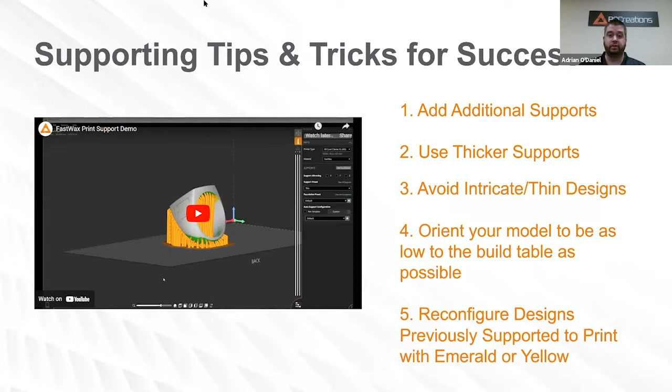So I'm going to start off with our first video, which is talking about supporting a part within the B9Create 2.0 software. Before I start, I'm just letting you know this support scheme does work for both 1.0 and 2.0 users. I'm just demonstrating 2.0 today. So I'm going to go ahead and start sharing this video.

Hello, today I am going to show you how to get a ring prepared within the B9Create 2.0 software to print using our FastWax resin. The reason why we are making this video is because to print properly within FastWax, you have to change how you support the ring. You can't use how you used to support a ring within Emerald or Yellow because FastWax is a different formulation of resin, so it requires a slightly different approach in order to get successful prints.

The ring that I'm going to show how to support today is our Matrix Signet ring, which is like a class ring type style ring. I'm going to go ahead and open that onto my build table here. That part is just the same as any other ring or any other print. So once I have the ring on my build table, I'm going to go ahead and center it and zoom in a little bit.

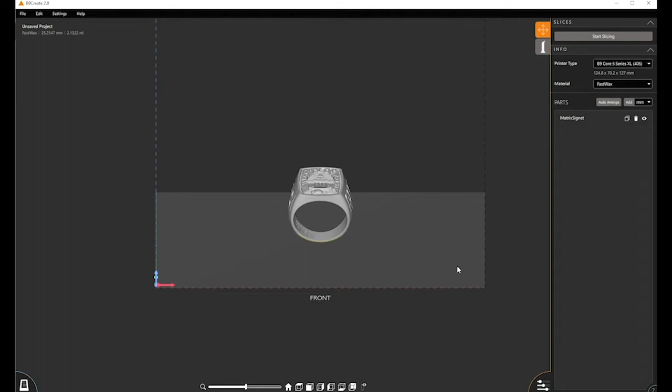First thing I'm going to do is turn the model to the side and click on it. And I know for this ring, I need to tip it forward like so in order for it to print properly. So once I've done that, I'm going to turn the ring back to the front. And then I'm going to make sure that it is just slightly above the build table. So my goal is to get the part as close to the build table as possible and then just raise it up just a little bit.

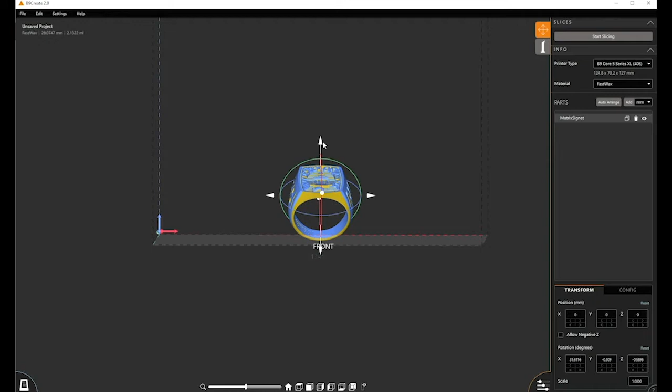That's because those first few layers on our printer come out at a different dimension because they cure longer. So you don't want the bottom part of your ring to be a different size. So then once I have the ring ready to support, I am going to come over here and click supports. And then my ring is ready to start adding supports.

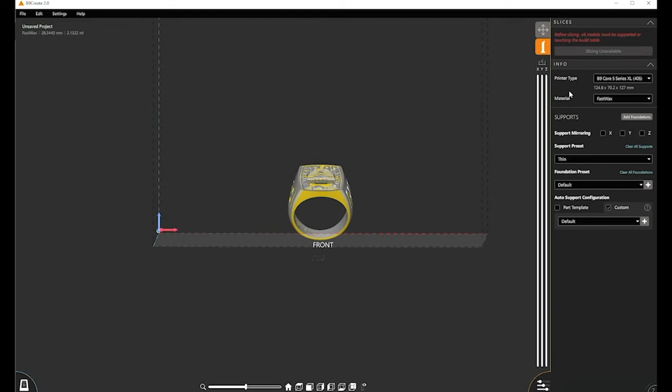So the first thing I'm going to do is add support mirroring at the Y axis. This is going to enable me to add supports to both sides of the ring, but only need to click on one side. The next step before I start adding supports is under support preset. I'm going to change this drop down and make sure that it is set to thin.

If you're using tiny, you are going to have prints fail to come out either the right shape or they're just going to fail completely because the support doesn't work. So FastWax is very soft while it prints. And if the support is too skinny, it is going to wiggle while it prints, and it's not going to stay connected to the model or to itself during the print process. And then you're going to end up with the support not doing its job by the time it gets to the ring.

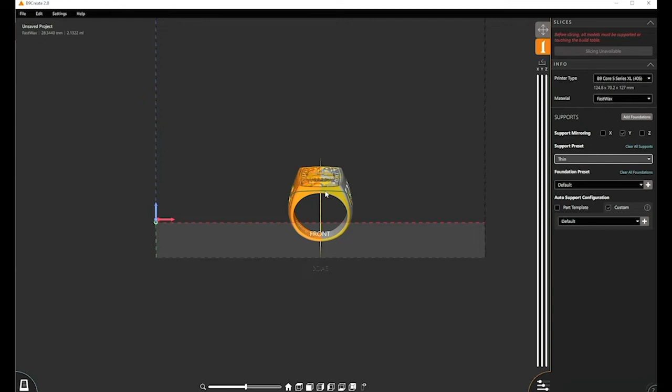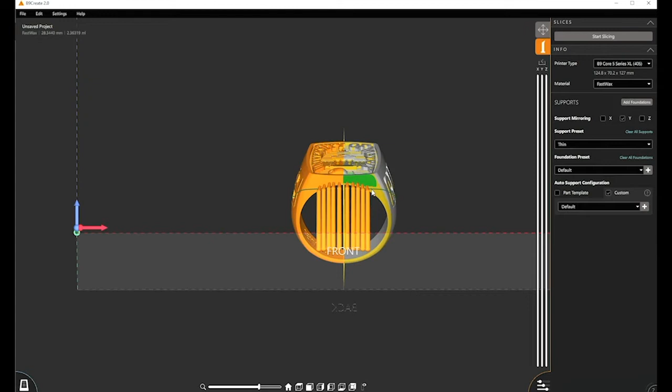So now I'm going to zoom in a little bit, and my goal is going to be to start adding supports simply by pointing and clicking. I'm going to start around the bottom edge of the ring, and as you can see, I'm adding quite a few supports here. So as I'm going around, we are just supporting this, and you are adding way more supports than you would with a different type of resin.

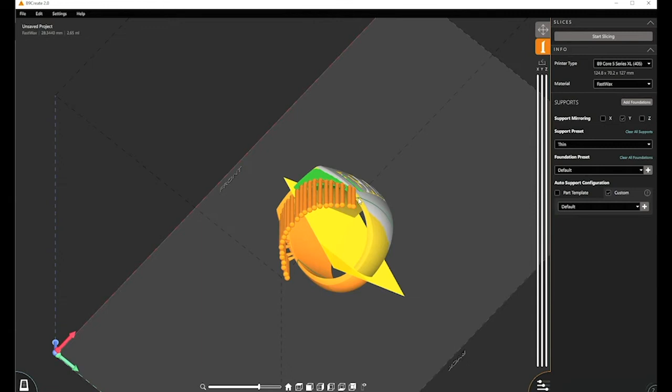And that is because, again, the resin is soft, so you have to do it this way in order for the ring to print successfully. And it's not just rings, it's any part. So coming down around, and as you can see, as I'm adding supports on this side, the supports are automatically adding to the other side, so that's a handy trick here.

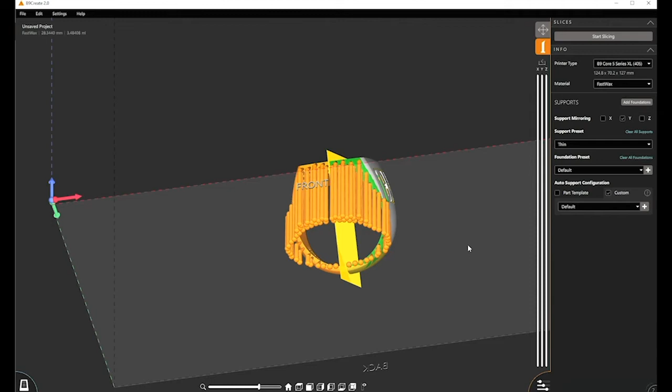So now that I've done the bottom part, I'm also going to come up here and start adding supports up on this side. So even though it is already colored green in these spots, I know because FastWax struggles with the support being soft and pulling off on the model, I am going in and adding extra supports.

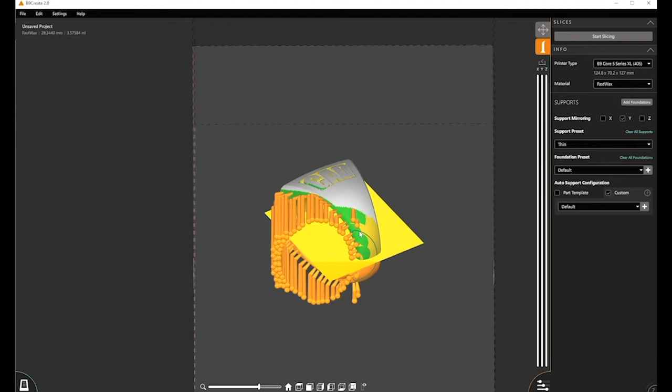Now I'm also going to spin around and I need to get under the shank here. So I'm going to get this edge, and then I'm also going to come down and support right through here, because this also needs to get proper supports. And then I'm also going to add another row of supports right through this middle here, so there's proper support under there.

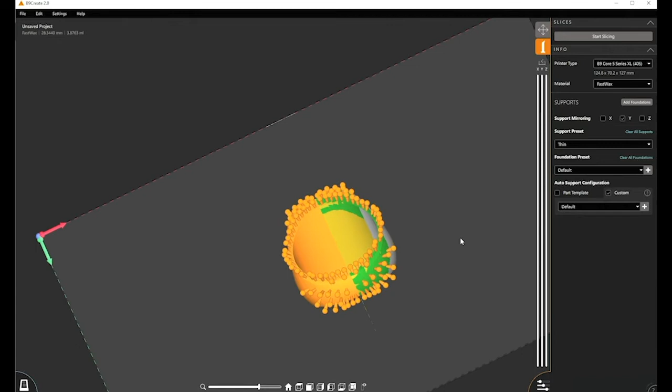Now one other thing is I'm going to look at the ring from upside down, and then I'm going to use this handy sectioning tool right here. This is the Z. I'm going to move this up just a little bit so it will hide the bottom part of the ring. Now I need to come in here and add adequate supports inside of the shank, because it will also need adequate supports in here in order to print properly.

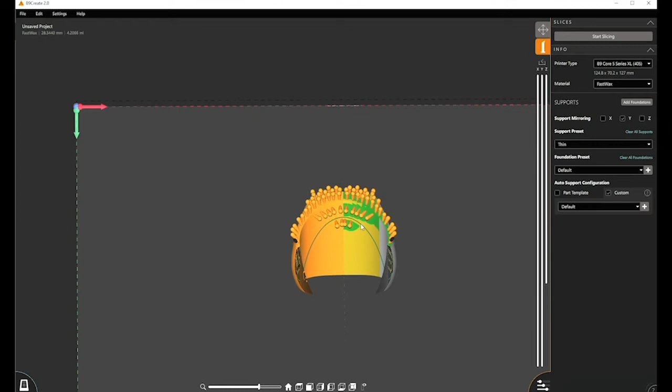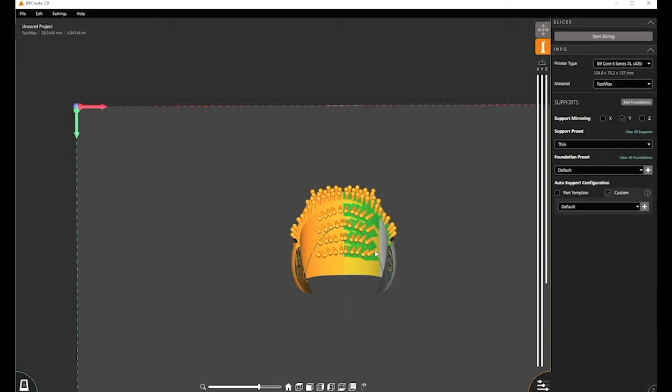Now while I'm doing this, you may wonder what kind of rings or parts that you should use FastWax for. You should only use FastWax for parts that are not terribly thin, and also parts that aren't intricate. Now not to be confused with detail. Intricate meaning like if it has a lot of little thin sections within the ring or the model.

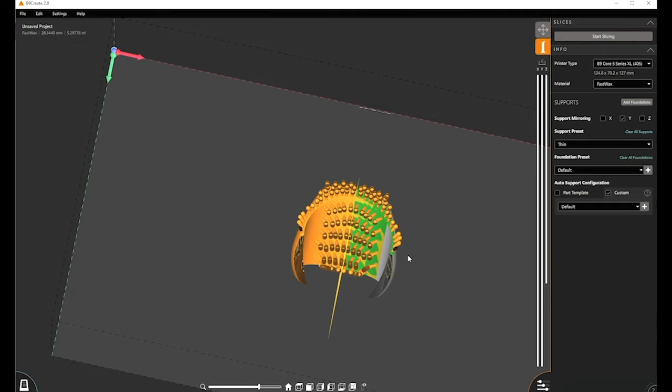Anything that's too thin you're going to struggle with FastWax printing properly, because it's not going to stay connected to itself while it's printing, or while you're trying to clean it. It's going to potentially break apart, and you're just going to struggle with getting that part to print within FastWax, and that's when you would want to go back to using one of our traditional yellow or emerald resins.

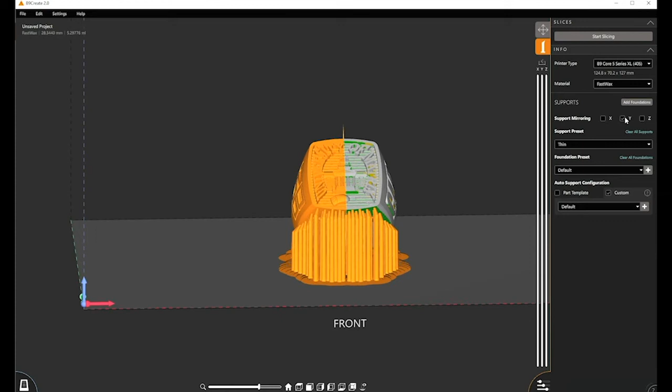So now that I have the ring supported, I can turn off my Y. I re-added my support bases. I just had them turned off previously. But now as you can look around, you'll see that the ring has adequate supports all over. So then the next part is you just slice your ring, and then you load it to your printer, and you are ready to print your ring within FastWax.

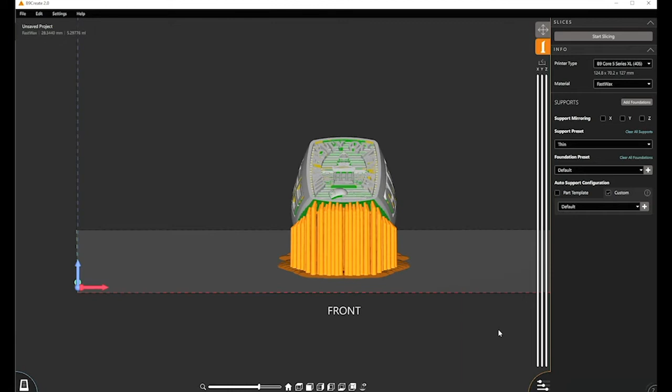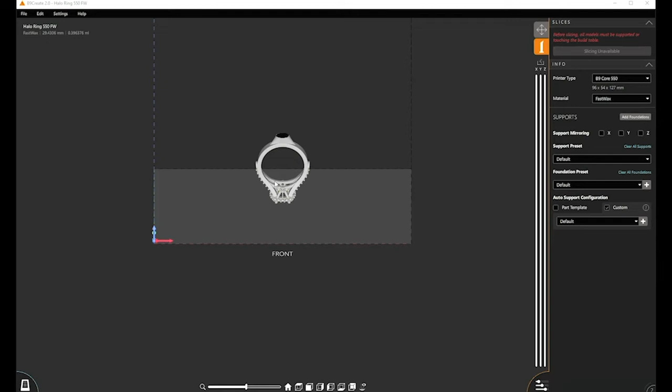Hello, today I'm going to show you how to support a halo style ring using our FastWax resin. I'm going to demo this on a B9 Core 550, but this method will work for all of our Core series printers. So as you can see, I already have a ring on my build table, and I have it upside down. The reason why I chose to print this ring upside down is because the halo, or the more detailed portion of the ring, will print better if it's lower to the build table.

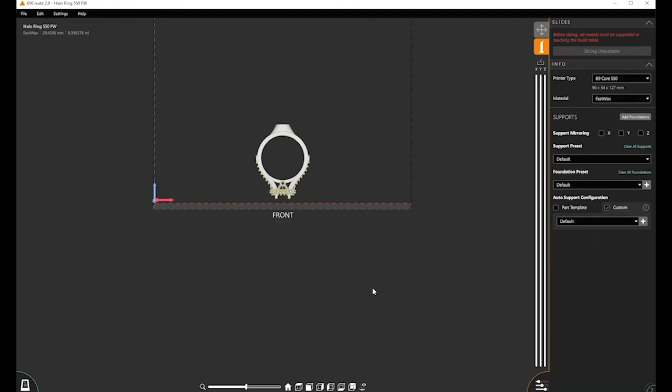With FastWax, this is the best way to set things up, if you can get the more complicated part lower to the build table. So the first thing I'm going to do, I already have my support tab selected. I'm going to turn the ring upside down so I can look at it from the bottom, and then I'm going to zoom in. Then I'm going to come over here to my support presets. First thing I'm going to do is change this drop down to tiny.

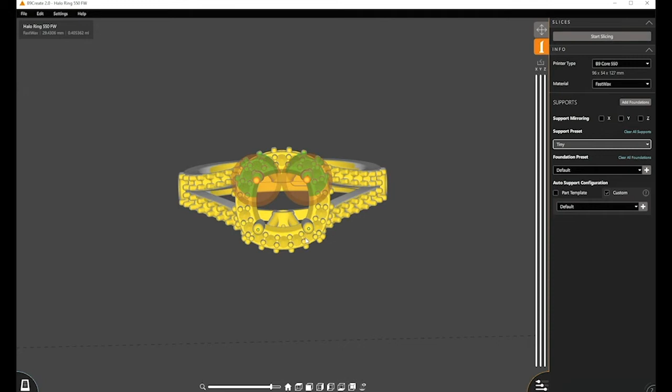The reason why I'm picking tiny is because I need to support these prongs. So there's 4 of them, so I'm going to support each prong. As you can see, I'm going to support just the very end of it. And then what I'm going to recommend is turning off your support bases so you can have them hidden.

Now leaving it on tiny, I'm then going to go in and start supporting all of these smaller prongs on the ring. The reason why I'm supporting all of the smaller ones is because they are all considered an overhang. So they're all going to need to have a small support in order to print properly.

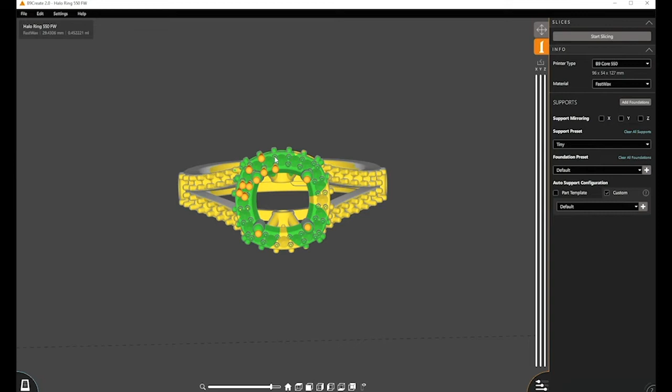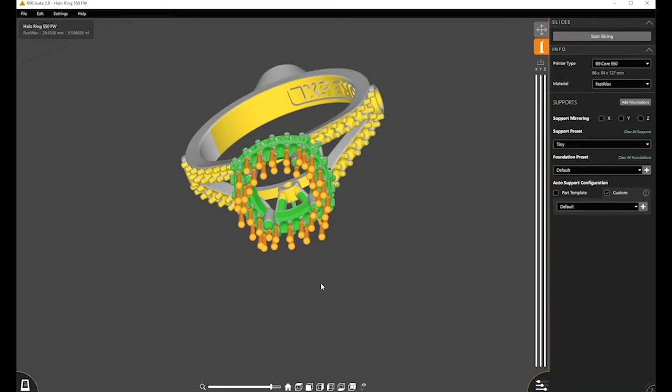And the reason why I chose tiny for the part on the lower end is so there's minimal support scarring. So when you go to clean or post-process your part, you're going to have very small support scarring left behind on your ring. So then you want to just kind of back out and take a look, make sure everything looks good. So that should be good for all of those overhangs on the very bottom.

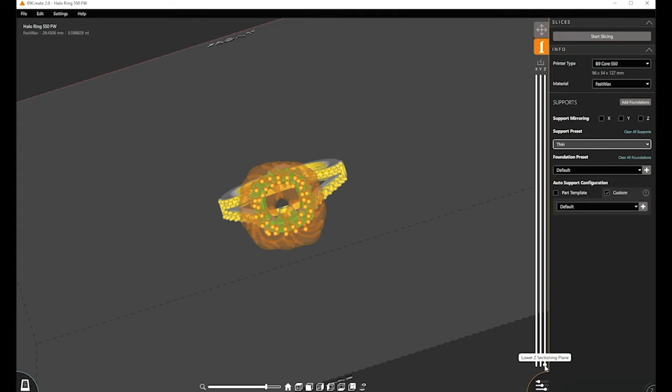The next step is to come over here to your support preset and change it to thin. Then I'm going to use my sectioning plane, and I'm going to grab the Z at the bottom, and I'm going to move this up just a bit. And the reason why I'm doing that is because I am going to now come up here and add some supports at the top of the shank. So let me go ahead and zoom in here.

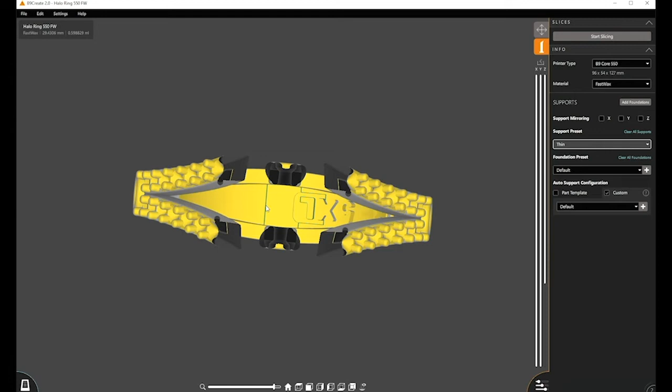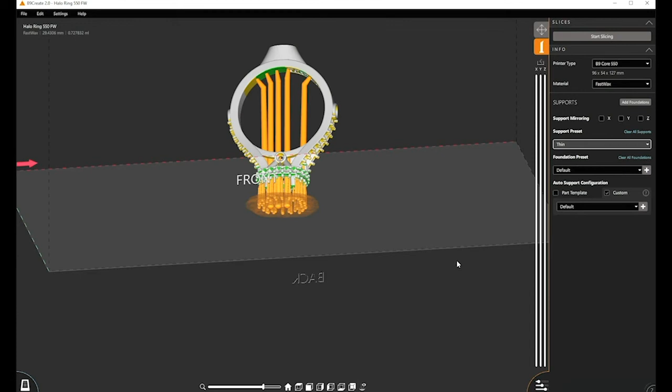And we're going to add a support right there. We're going to add a support over here, probably one right about here. And I'm going to put one over here in the corner and one right there. Now I'm going to zoom back out, and I'm going to give this a look from this angle. And what my goal was is to try to get these supports to come down through the middle of the halo or to connect to the top of the halo.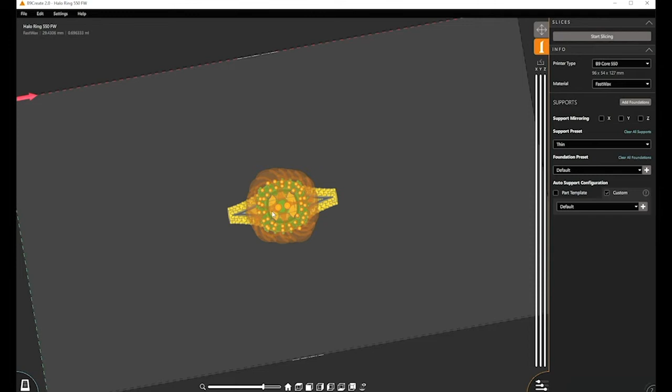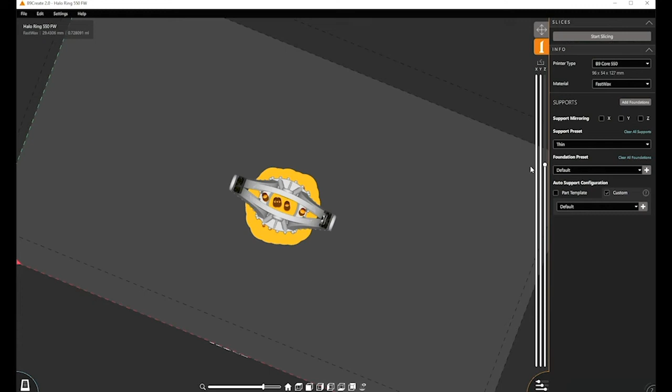So like this one here, I'm actually going to redo. That one was a little too close to the side of the halo, so that wouldn't do its job correctly. So I'm going to do this again, and I'm going to add one more support just a little bit closer. That way it gets into the right spot there. And then I'm going to look at it from the top again, and that looks good. So at this point the ring is ready to slice, so I would go ahead and slice this ring, and it would be ready to go.

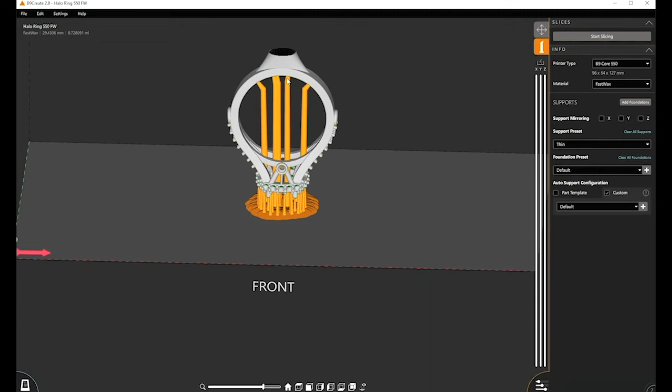Now again, with FastWax, you're going to see your volume indicator up here in the top left corner. Once you're done supporting the ring, this is the number that you would use to calculate how much resin you would put in your vat. Also, it is totally fine that your shank is still on the ring up at the top. That part can still be printed just like this. I've printed this ring successfully several times in this manner, so you don't have to remove the shank.

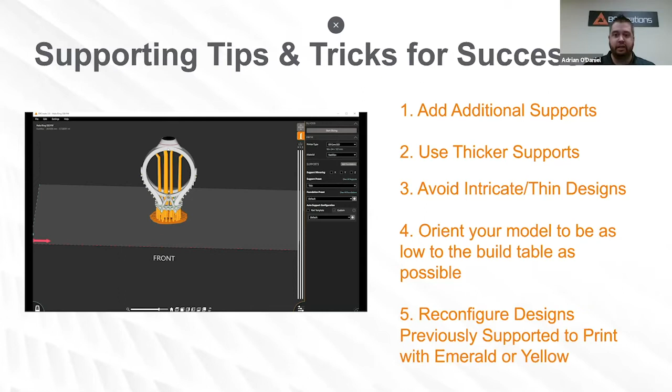All right, so that's the end of that first video. So really the main focus that I want to touch on is with FastWax, you do need more supports because it is softer, so it is going to potentially wiggle while it prints, and if it does, you're going to have a failed print. So hopefully me showing those two rings was helpful when we talk about reconfiguring your design for a ring you printed in yellow or emerald. That's kind of what we mean: you've got to think about it a little bit differently, and you do have to support the part a lot more in order for it to print properly.

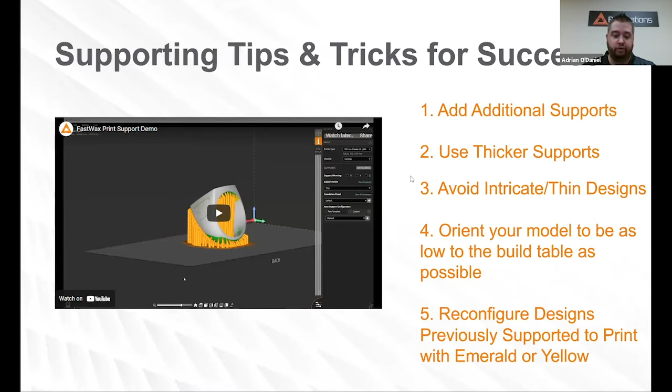So some of the do's: obviously, we keep talking about adding more supports. You do want to do that. When we talk about orienting your model as low to the build table as possible, like this halo ring, because that halo part is bigger and there's a hollow section in the middle, it makes more sense for it to be closer to the build table so it can get printed first, because when it prints up at the top, there's more opportunity for it to wobble. And then you're going to have a really challenging time getting the supports up to support the halo part properly, and you're going to see a print failure.

And when we say print thicker parts, if a ring is too thin, like I said, it's going to break apart when you're either trying to print it or after you've successfully printed it and you're post-processing and pulling the supports off. It's very easy to accidentally pull the supports or the ring itself apart, or whatever jewelry you're printing, when you're just trying to remove the supports. So we'd recommend trying to not print too thin of things with this resin and stick with yellow or emerald for those.

Another note is to keep your FastWax in a room temperature environment. If it's too cold, it's going to separate a little bit, and then it's going to be really difficult for you to get it mixed properly when you put it back into the vat. So just keep it at room temperature and then make sure you shake it very well before you print. I usually do 30 seconds to a minute of shaking before I print it.

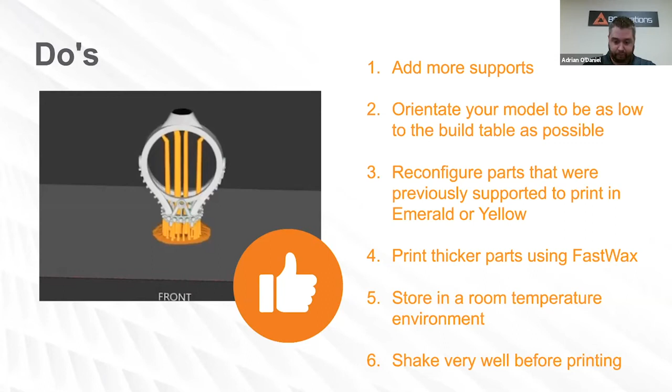We also recommend not reusing resin. The reason for this, and I know this is always a popular question, is because the resin is partially wax, 20% wax. What happens is when the print is going through the print process and the resin is being exposed to the UV light, it will cause the resin to start to break down. And what will happen is if you reuse resin, you're gonna end up with prints failing, and you may think that there's something wrong with the printer, when really it's the way that the resin breaks down throughout a print.

For that reason, we don't recommend printing parts that take longer than about 2 hours. The reason for that is because as the time goes on, over 2 hours, the resin that's in your vat will be exposed to UV light, and you're going to notice cured resin will start to stick to the part that's printing on the top. Like I said, don't print overly intricate or thin parts, because it's just either not going to print or you're not going to be able to clean it.

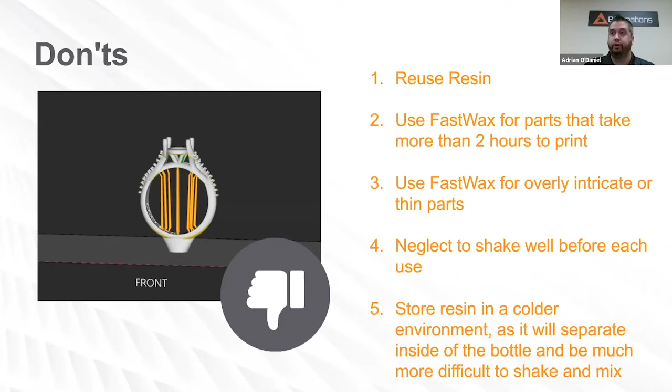As with any of our resins, if you neglect to shake your resin well, it's not going to print properly, because the mixture isn't going to be the way it needs to be. And then of course, like I said, don't store it in a cold environment, because it will separate, and then you won't be able to get it shaken back up to the print consistency that it needs to be. Now, a lot of this information is on our instructions for use, so I'm going to go ahead and play this video so you guys will know how to find this.

Hello, I am here to show you where you can find the instructions for use for FastWax on our B9 Creations website. To find the FastWax instructions for use, you simply go to www.b9c.com, hit enter. Once you are here, if you come over to product and then scroll down to materials, it will load our materials page. You're going to scroll down to the FastWax section and you click instructions for use. It will take you to this page where you simply click the download FastWax instructions for use link, and it will download the PDF with all of the directions on how to use FastWax.

You can also get directly to this page by simply going to www.b9c.com/FastWax, and it will take you directly to this page as well.

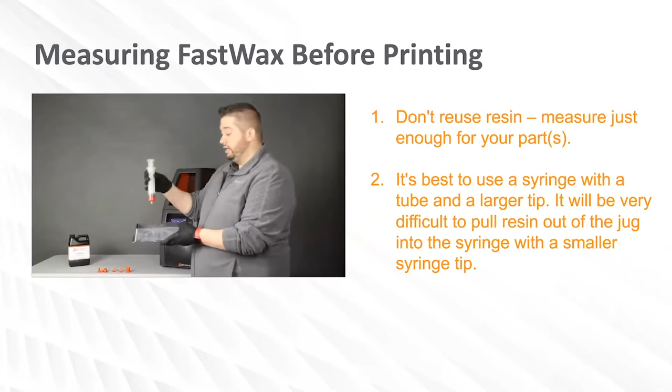So you simply take the syringe and you hold it over the film and you squirt it inside of the vat. Now you're going to notice what's different between this and the other resins that we print with. It's not going to fully cover the film like it does with the other resins. You're going to kind of swoosh it around to get full coverage, but there's not going to be a lot on there, and that is normal for FastWax.

So then you just take your vat, insert it into the printer like you do with any other resin, lock it in place, make sure your build table is on or screwed in, close the door, and now you are ready to print.

So the ring that I'm going to print today is going to be that matrix ring, which is this ring right here that I printed. You notice that I have a lot of supports on here, which I discussed earlier. You just go ahead and hit continue. Make sure you hit FastWax and hit continue again to start your print.

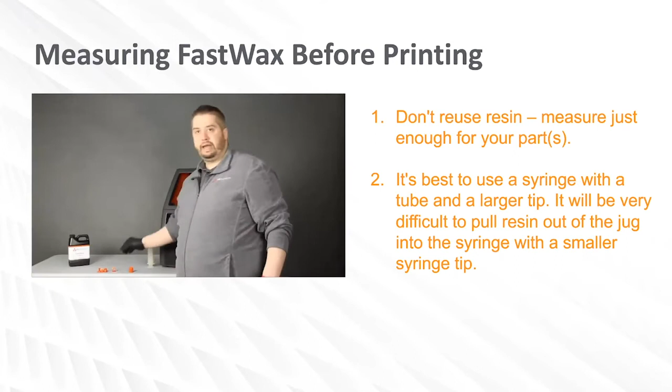Now, once the print is done, it's going to come out looking kind of palish orange. You will put it into a clean unit like you normally do. You will see some discoloration after it comes out. It is normal that FastWax will have discoloration like this. It doesn't affect the casting process in any way.

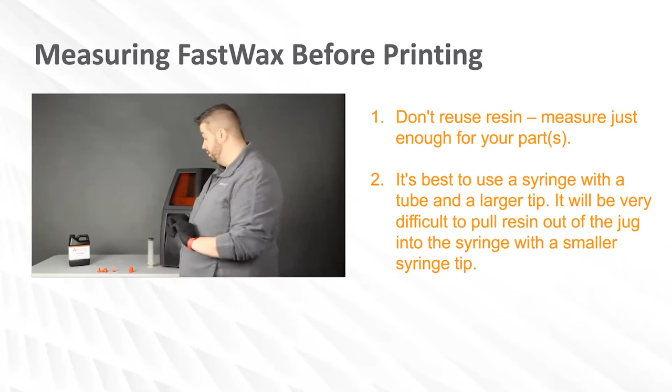As you clean it more, the white parts may become more visible, and then after you cure the part, you will see some permanent white marks on it. But again, that doesn't affect the casting. That is normal for FastWax.

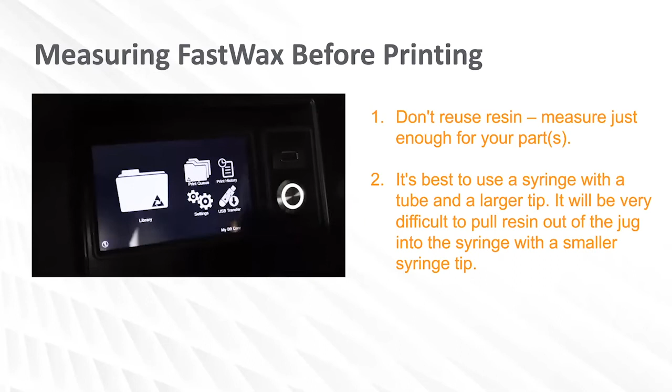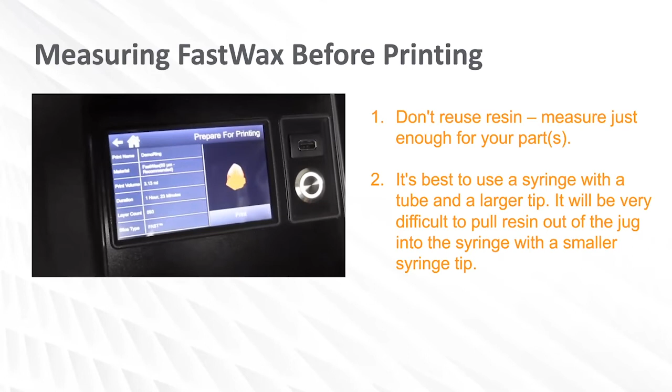So to find the volume on a print, you simply go to Library. Once your library loads, you're going to go to the part that you want to print and hit continue. Then you're going to pick the resin that you want to print in and your resolution and hit continue. And then right before you select a print, there is a volume right here. That is the volume that you want to use to calculate how much resin you're going to use with FastWax.

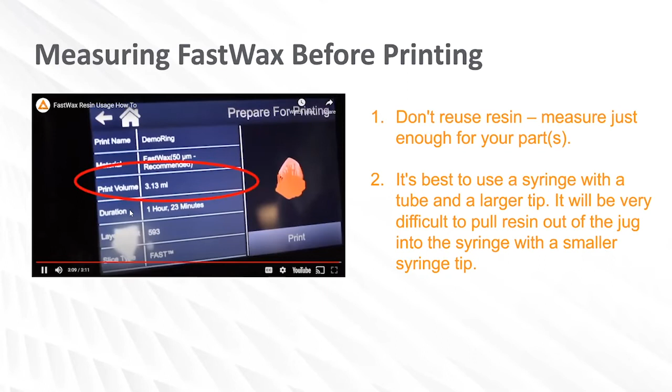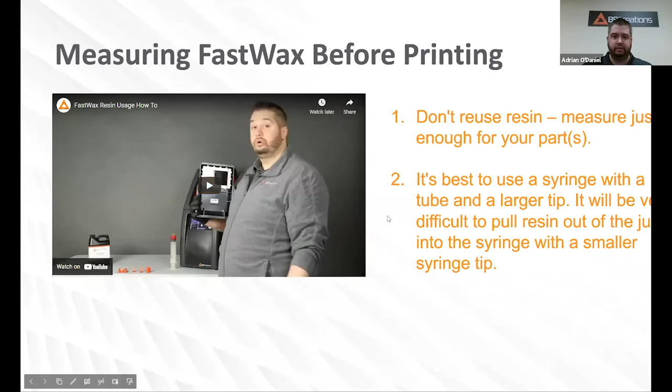All right, so that was basically getting your vat ready to print with FastWax. I know that we used a syringe. One thing that I'd like to stress is if you do get a syringe, if the end of the syringe is too narrow and you use a tube to try to pull the resin out of the jug, it's going to be really difficult. So I recommend trying to find a syringe that has a wider end on it. That way, when you're trying to suck the resin out of the jug, it doesn't take a lot of force, because that can be a challenge.

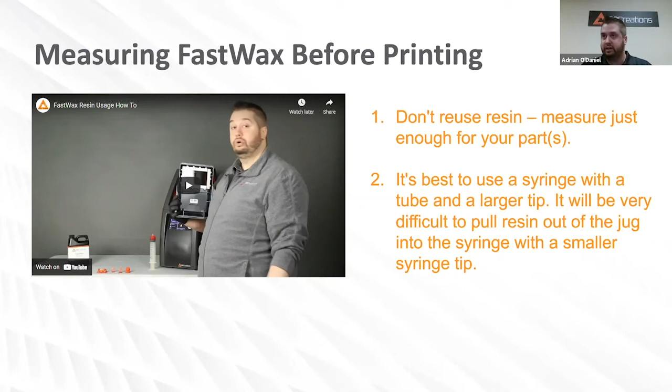This is just one way that we recommend measuring FastWax. There are other methods out there. This is just the one that we found to be the least messy and the most effective for getting the number that we want.